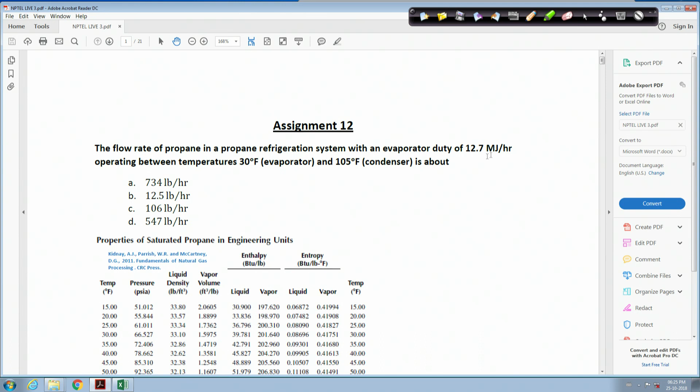I hope you will not face much trouble solving those problems. So with this, I now come to some of the problems which I am sure many of you have done correctly. I start in a reverse manner, from assignment 12. Let us see assignment 12 first: flow rate of propane in a propane refrigeration system with an evaporator duty given between two temperatures, and we are asked to find the flow rate.

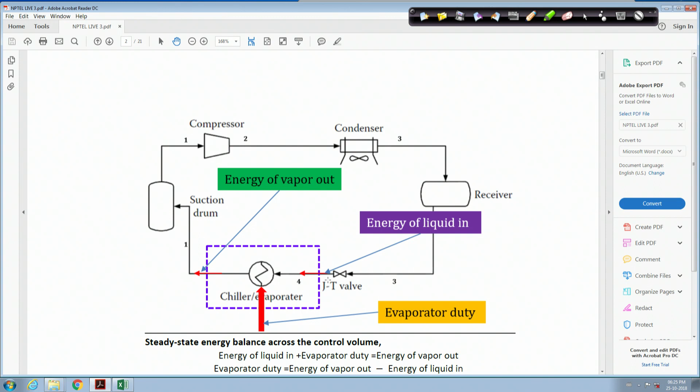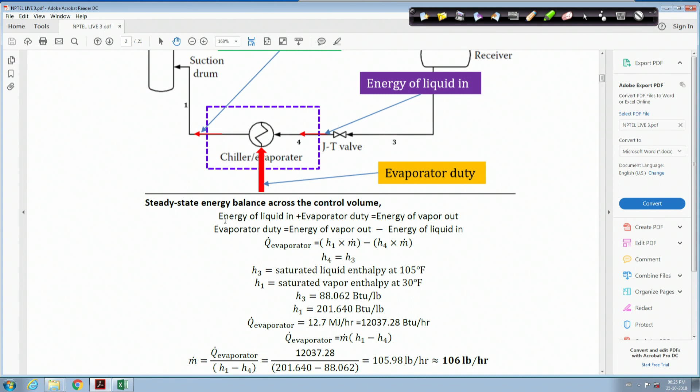This particular table has been provided to you to find out the various properties, and the solution is in a way quite straightforward because this particular system was shown to you in the lecture. So you have to refer to this particular figure, and this kind of problem was also done in the assignment and in the tutorial. You see that to solve this problem, basically you are making one energy balance.

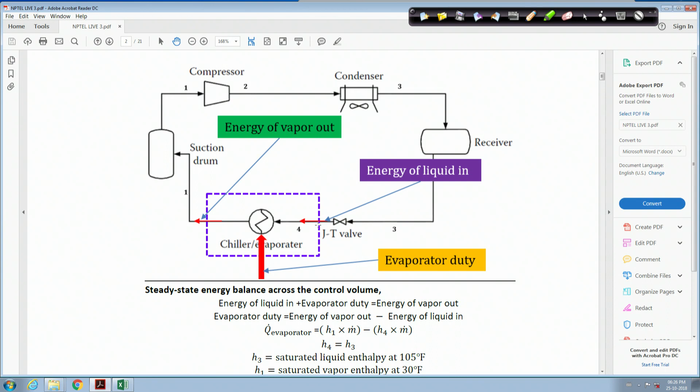If you know how to make an energy balance, you should not find any problem in solving this particular problem. Here the energy balance has been done, and here you are getting the evaporator duty, the enthalpies, the mass flow rates, and also as I told you, this particular JT valve is generally an isenthalpic process. That means the enthalpy at the inlet and enthalpy at the outlet are the same, so here you find that H4 equals H3.

So if you make this kind of thing and if you can properly locate the temperature and pressure at each of the streams, then you simply have to read out the values of H, that means enthalpy, and plug in the values in this particular equation, and you will be able to get the Q evaporator in terms of m dot, H1 minus H4, and from this you can find out the particular m dot. So this is the thing.

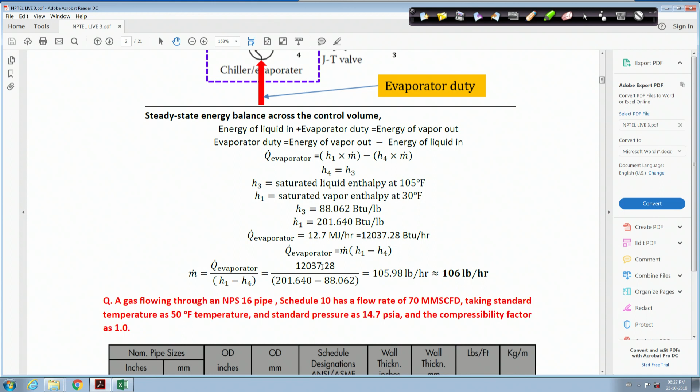Now understand one thing, that here you have been given the whole problem in a particular set of units, that is the FPS units. It does not matter what kind of unit systems are given to you, even if this kind of question is asked in SI system, or you find that sometimes there are mixed units, some SI, some FPS. So before you start solving, please make sure that you are putting all the units in the same system, then you will not commit any mistake in the final result.

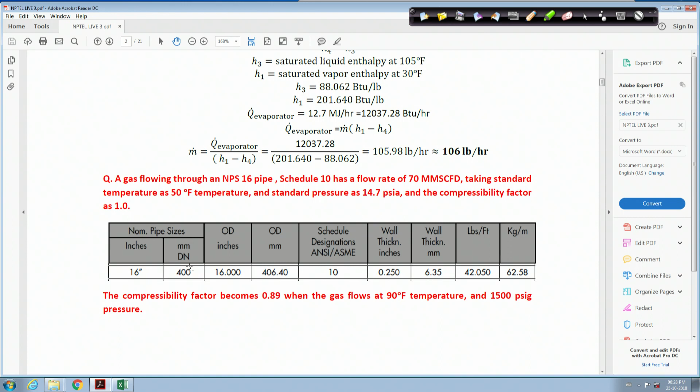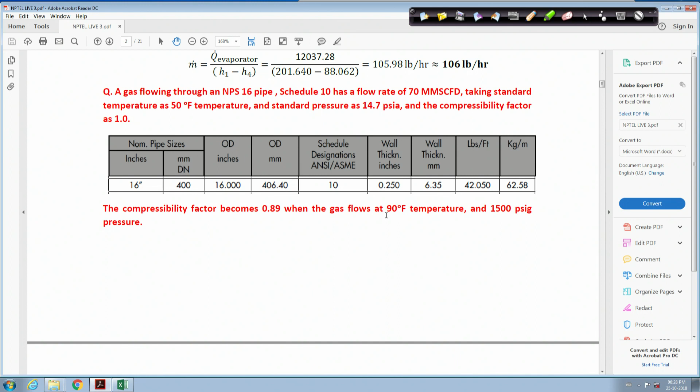Now let us come to the second problem. In this you have a gas pipeline which is NPS 16 pipe and schedule 10 which has this flow rate, and standard temperature is taken to be 50 degree Fahrenheit and standard pressure as 14.7 psi, and the compressibility factor is taken to be 1, that is it is assumed to be ideal. Then you have been given that this compressibility factor is about 0.89 at a gas temperature of 90 degree Fahrenheit and 1500 psig pressure. Now you have to find out the flow rate of the gas. So what kind of flow rate will you get?

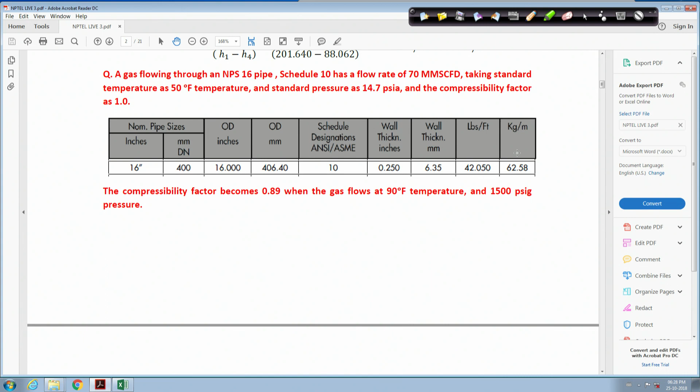Now here also these particular figures are there, this particular table you can see. This table gives you the nominal pipe size both in inches and millimeter, and then OD, ID and the schedule number, as you know this signifies the thickness of the pipe, and as per the schedule number you are given the thickness also, and here are the weight of the pipeline per unit length. Based on this you have been asked to find out the flow rate and the flow velocity of the gas in some particular unit.

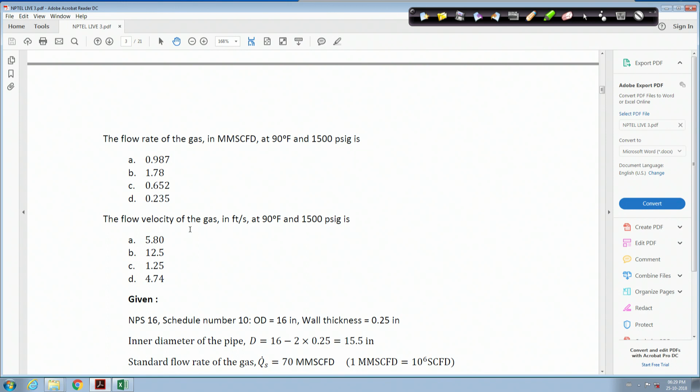Now you see that here also first you put all the information which have been supplied to you, and one thing I again repeat: sometimes you may find that the information provided to you in the particular question may be in excess of what is required. So you put all the information given in the question, but also make a proper judgment of which information is needed to solve it. You may not always need all the data given to you in a particular question. So you have to be very careful about that, and never think that if you are not finding the use of certain data in the particular problem, you are going wrong. It is nothing like that — sometimes excess data are also given.

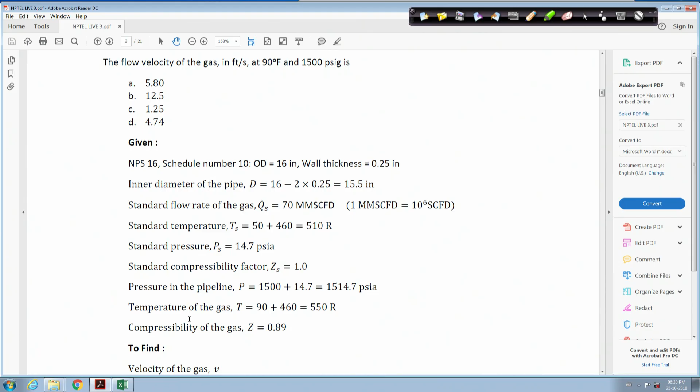On the other hand, if you find that some data may be missing in the question, it might sometimes happen. So if you find some data are missing, you can judiciously assume some values, giving some reasons, and then you can solve it. Generally it won't happen in such examinations, we also check the things, but if in any case this kind of thing happens, then you can go ahead with some justification, assume some data, and do the solution.

Unless you justify properly the assumed values, that will lead to some wrong answer, so you should be careful about that.

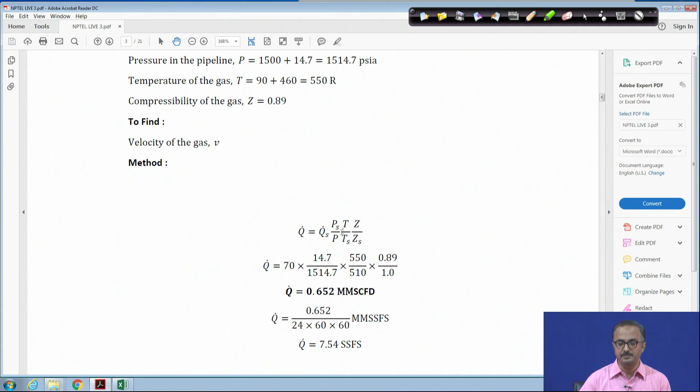In the lectures we have shown this kind of equations. These equations come simply from the gas laws, and in the gas laws, as you know, you have to give corrections for the pressure and temperature. So similar corrections have been applied to this particular problem, and you get the actual volumetric flow rate in terms of the standard volumetric flow rate, standard pressure, standard temperature, and standard compressibility factor. P, T and Z have been given in the problem, so you plug in the values and get the volumetric flow rate.

Once you get the volumetric flow rate, it is very simple to get the velocity, and this velocity is the superficial gas velocity. You have to consider the cross section of the pipeline, found by knowing the inner diameter, which is found by subtracting twice the thickness from the outer diameter. From that you can find the area of cross section, and you get the velocity by dividing the volumetric flow rate by the area of cross section.

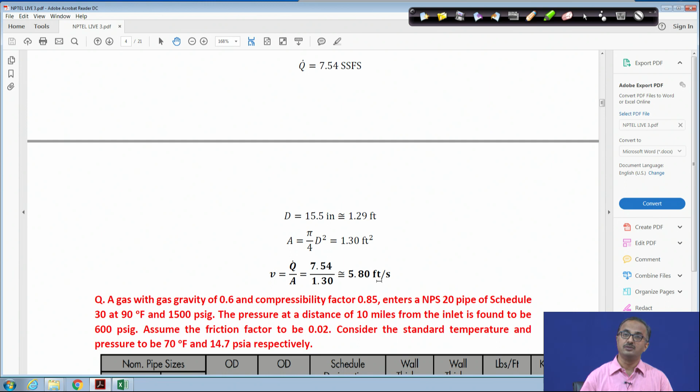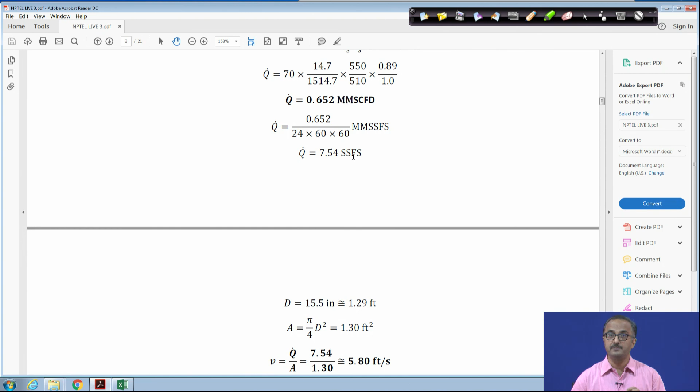Only thing you have to be careful about: when you get the volumetric flow rate in cubic feet per day, and you've been asked to give the velocity in feet per second, you first have to convert cubic feet per day into cubic feet per second. Only then should you apply this formula to get the velocity in feet per second. So this kind of unit manipulation you should be very careful about. The units are very important, and whenever you are solving problems in the rough, you should always put the units so that you do not commit any mistake, because if you put wrong units, you are going to land up with wrong answers. So avoid any kind of mistakes on the units.

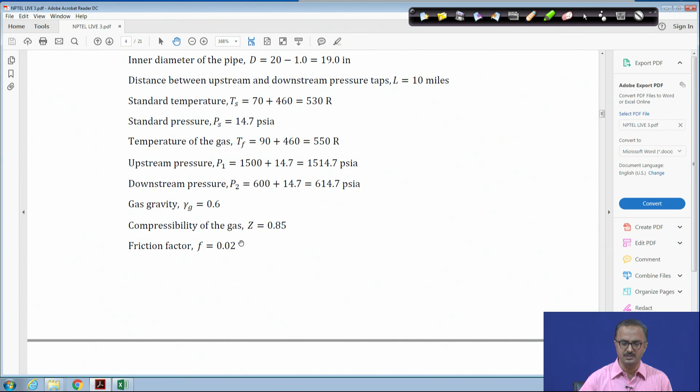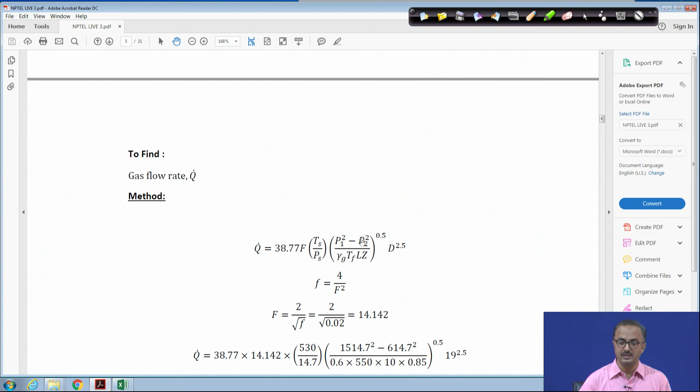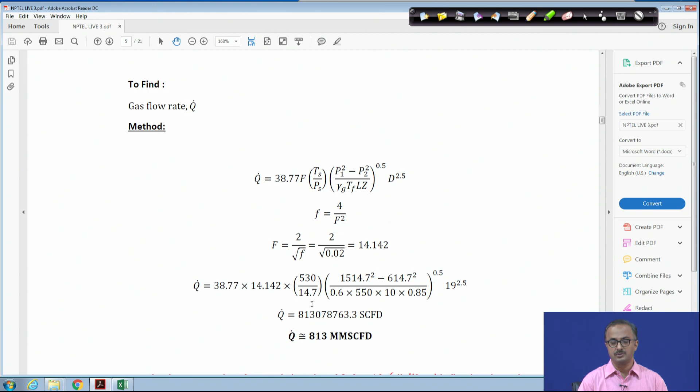This next question is similar to the previous one, so I will not go through it again. You'll find that similar formulas have been given in your assignment also, so you simply plug in the values in this formula and you can get the answers. Now understand one thing: whenever you get such a big formula, it is not expected that you will remember all the big formulas. Some very basic formulas you need to remember, but if the formula is quite big and complex, you are not expected to remember those formulae. Many of the formulae will be given to you without mentioning exactly where to use them, but if you have learned the theory properly, you should be able to pick up the right formula from the list given to you. Any complex formula will be provided to you for your convenience. You should just make sure you know where to use which formula.

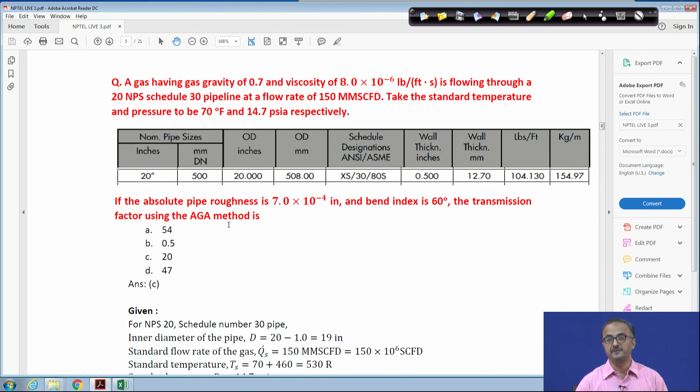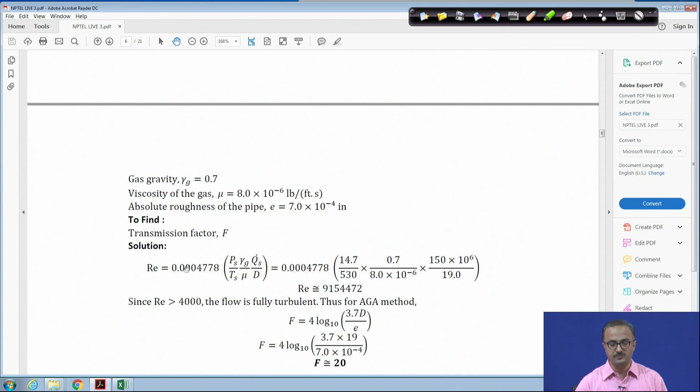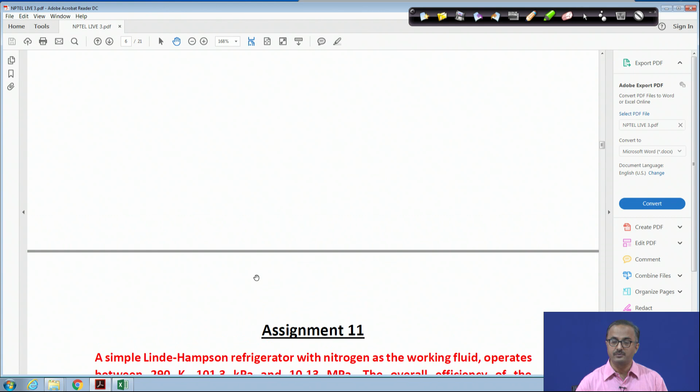This particular question is coming because I taught you different methods to find out the flow rates and the velocities, etc. These questions in assignment 12 were based on these different formulae, which you can check from the tutorial problems where solutions have also been given, or in the lecture notes. In this particular formula, we have to find the Reynolds number value, and as per the Reynolds number we have to find the value of F. This is what was asked in your question, to find the value of F.

Now let me come to assignment 11, which was focusing on the refrigerators, and in this particular problem this figure was given to you. Yes, this figure looks a bit hazy, but you can still read it if you magnify it. Just as I told you, whenever you are trying to interpolate values between the curves, you should try to make the best possible interpolation with your naked eye on this particular figure. There might be some small errors, but don't mind, the solutions are quite dispersed, the options are quite widely varying, so you should be able to get the right solution. Don't panic.

I hope by now all of you know how to read these figures, but let me quickly repeat how to read the figure. This is a temperature versus entropy diagram. On the y axis you have the temperature, given in Kelvin, and on the other side in Rankine. So these are the two standard temperatures in two different unit systems.

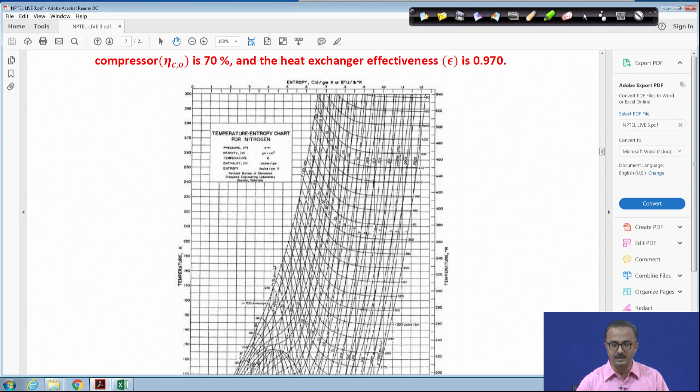On the x axis you find the entropy, and here on the top also you are given entropy. Again you see that these two systems of units are different. Here it is calories per gram per Kelvin, and here it is BTU per pound per Rankine. So these are the two systems of units which have been provided.

And here you see that there are many lines, curves are there. For example, these particular curves coming from left to right are the constant enthalpy lines. All the figures given to you, 300, 200, etc., are in joules per gram. So these are constant enthalpy curves.

Now you also see there are some constant density curves like this. It is given as constant density curve, in grams per centimeter cube. So all these constant density curves are there, and you find that different values of these densities have been given as you move from right to left.

Similarly, there are many constant pressure curves also there. From state you can find that here it is 0.1, 0.2, 0.3, 0.5. So you can see that the solid lines are the constant isobaric or constant pressure lines, and the dashed ones are the constant density lines. If you follow these lines properly, you should be able to get the answers properly.

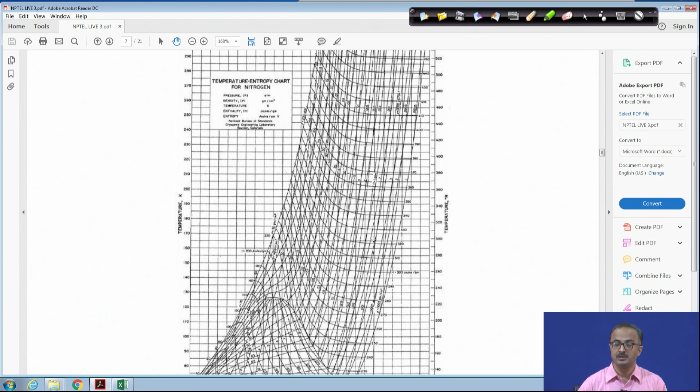As I told you, this dome structure is there. Outside the dome you have the superheated region, and on the left hand side you have the subcooled region, and within the dome you have the mixture of vapor and liquid. So this is how these TS, temperature versus entropy, diagrams are represented, and you can read them as per your requirement.

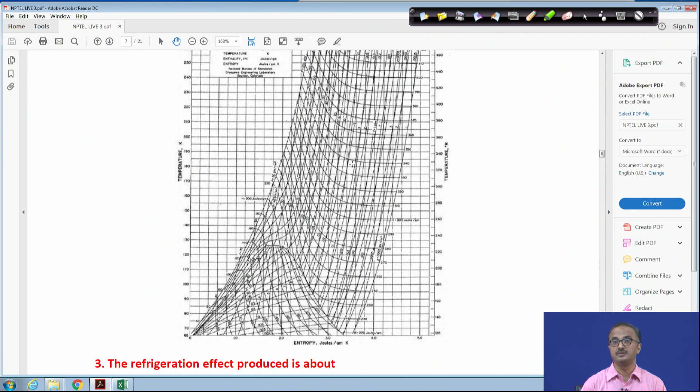Now you have been asked for a simple Linde-Hampson refrigerator with nitrogen as the working fluid. It is operating between 290 K and this much pressure, and at this pressure.

As you say, the simple Linde-Hampson ideally works isothermally from the compressor, because the compressor is taken to be isothermal. So only the pressure is changing from the compressor inlet to the outlet. Then, in the simple Linde-Hampson, you know that we are using a compressor, then a heat exchanger, and then a Joule-Thomson valve. After the valve, you are getting the cooled gas.

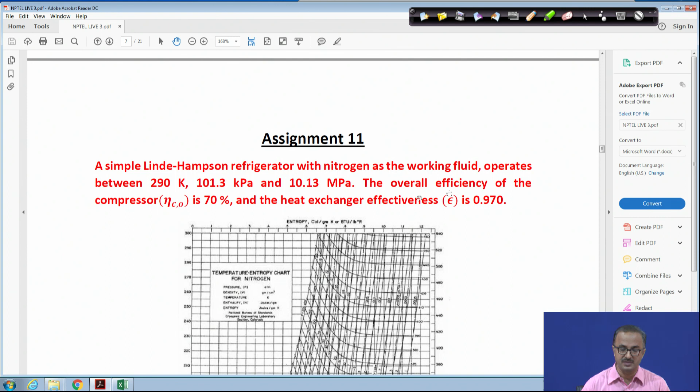The overall efficiency of the compressor has been given like this, and the heat exchanger effectiveness has been given like this. So you have been asked to find out the refrigeration effect.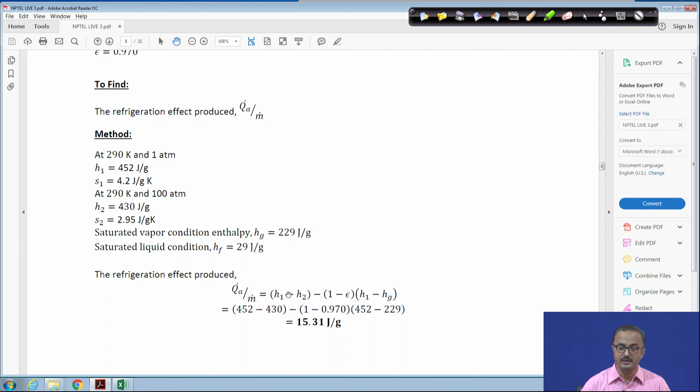Now again, all the formulas were given in the lectures, so you have to plug in the formula here to find out the duty, the refrigeration duty. That means how much refrigeration can be created in a simple Linde-Hampson.

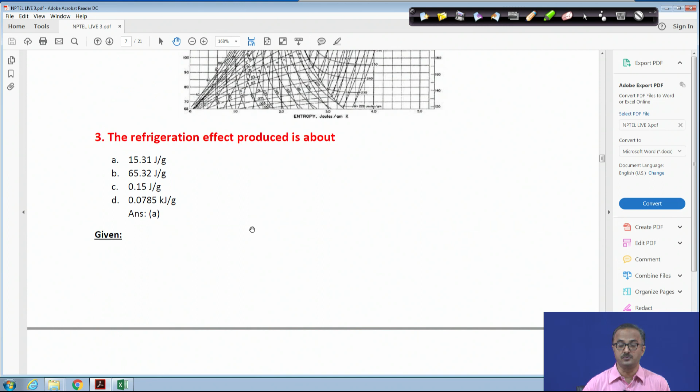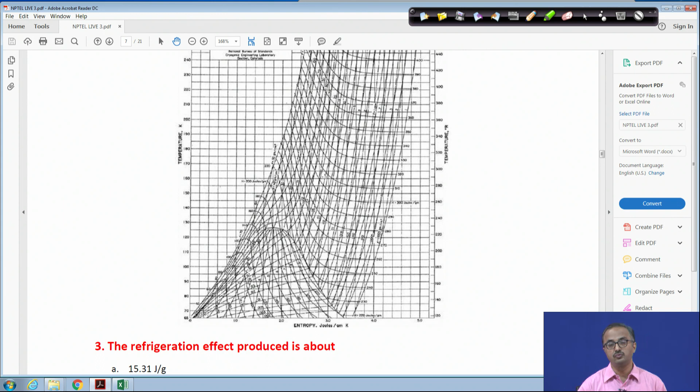One thing you have to be careful about is the kind of fluid being used. Here it is nitrogen, so we are using the TS diagram of nitrogen. If the fluid is changed, this diagram will be different. So you have to choose the appropriate diagram to solve this kind of problem.

Next, we come here, these solutions have been given to you, showing how to read these values.

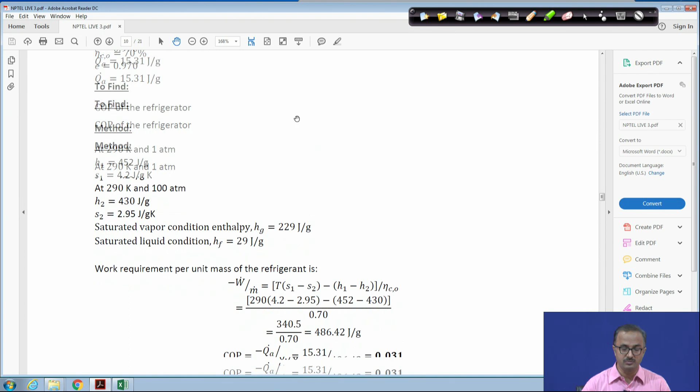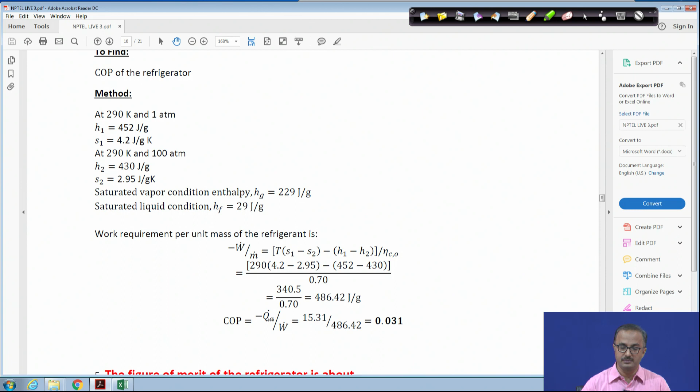Then the COP of the same refrigerator was to be determined, and again for COP you first find out the work done. This formula was also derived from thermodynamics. After finding the work done, you can find the COP by knowing the duty and dividing the duty by the work done. So, refrigeration duty divided by work done gives you the COP.

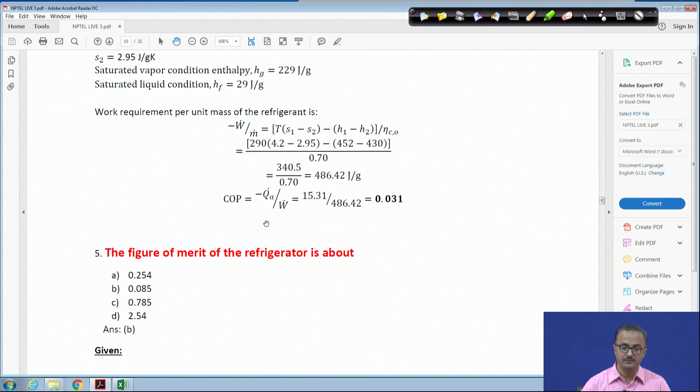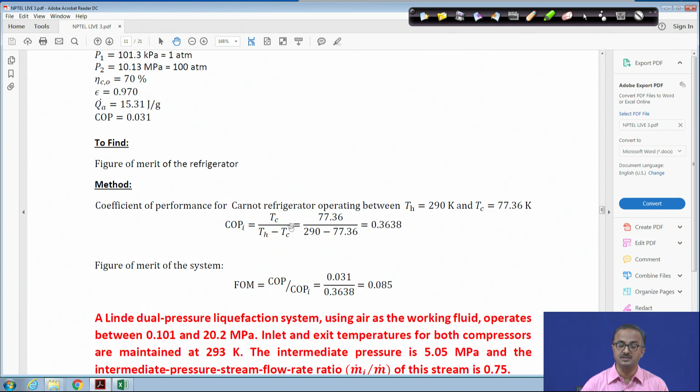Figure of merit means this is the actual COP, and if you know the ideal COP, the ratio of the two gives you the figure of merit - which is nothing but a deviation from ideal behavior. You have found the actual COP and the ideal COP, and the actual COP is much less than the ideal COP, which is expected. So the figure of merit is the ratio of actual COP to ideal COP, and this is the value you get.

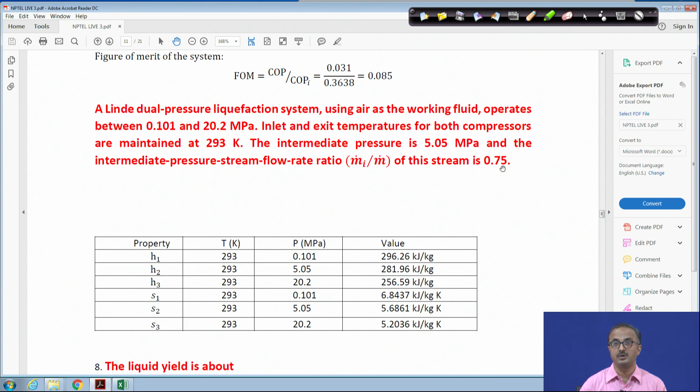The next problem was on a Linde dual pressure liquefaction system using air as the working fluid, operating between these two pressures, with these temperatures given. Because it is dual pressure, there are two pressures, so the intermediate pressure is given, and the intermediate stream is also there. If you recall the particular figure in the system, the intermediate stream is there, and the intermediate stream ratio is given as 0.75. These are some of the properties needed to solve the problem.

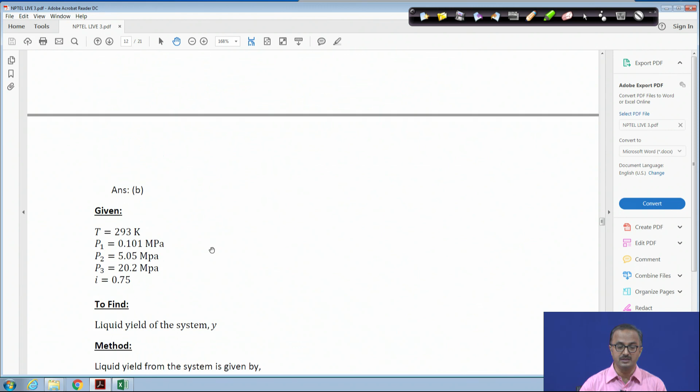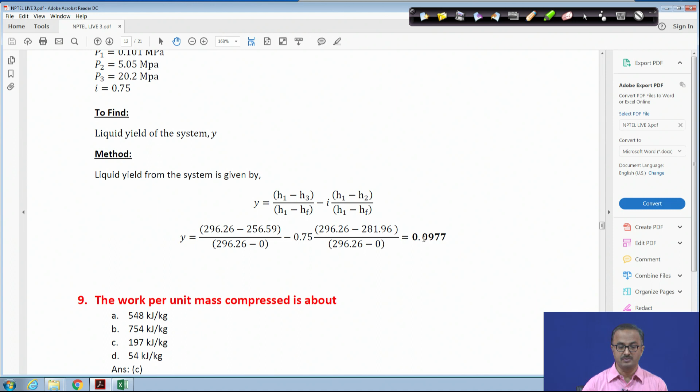This was also provided to you, and the liquid yield was to be found out using this formula. As we learned, because of this dual pressure and intermediate stream, even though it decreases the yield, it also decreases the energy requirement and compression requirement. So overall we are getting a benefit. This is the yield, and the work requirement is coming down.

Now, this is the work requirement. Again, for all these refrigeration systems you've been taught, you'll find that everywhere we are basically applying the first law of thermodynamics. So please learn this first law properly, and if you know how to apply it, you choose the proper control volume. If you have chosen the proper control volume, there is no reason for you to commit any mistake in such problems. They are very straightforward problems.

Once you have derived the energy balance equation properly, it is just a matter of reading the values properly from the given diagram or table and plugging them into the formula to get the answer. So just learn the application of the first law of thermodynamics - everywhere we are using it to get the answers.

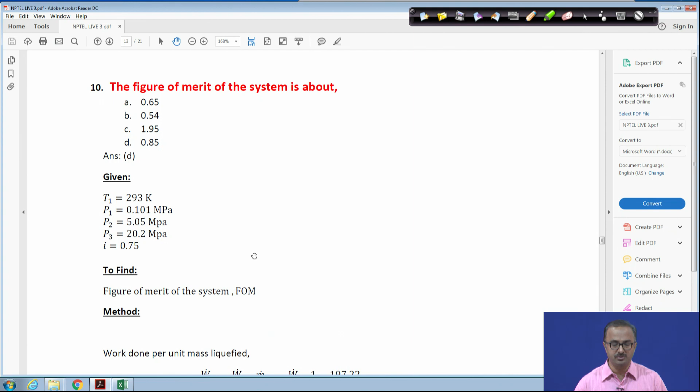Similar to the previous problem, here also we are supposed to find the figure of merit, and this is the formula - plugging in the values gives you the figure of merit.

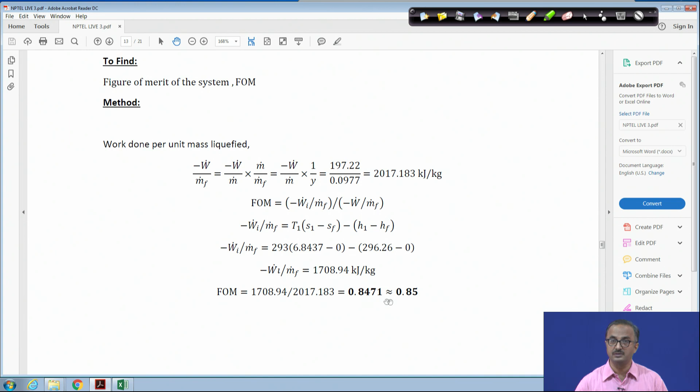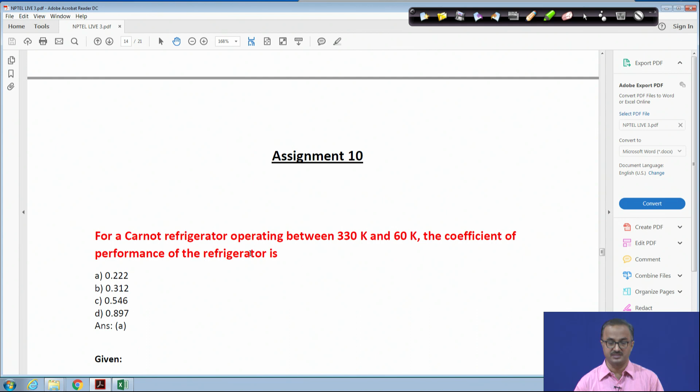Now I am skipping the theoretical questions, focusing only on the numerical questions in all these assignments. Coming to assignment 10, here we have a Carnot refrigerator operating between these two temperatures, and we are asked to determine the coefficient of performance of the refrigerator. This is a very simple, straightforward formula which you've been taught in thermodynamics - if you know this formula, you can get the COP.

This particular formula for the Carnot engine is very straightforward and simple, so this kind of formula is expected to be remembered by you. Not all formulas will be given, because some are very straightforward - for example, the ideal gas law or real gas law like PV equal to nRT or PV equal to nZRT. So this kind of formula will not be given to you; some you have to remember. Similarly, this formula for Carnot cycles should also be remembered.

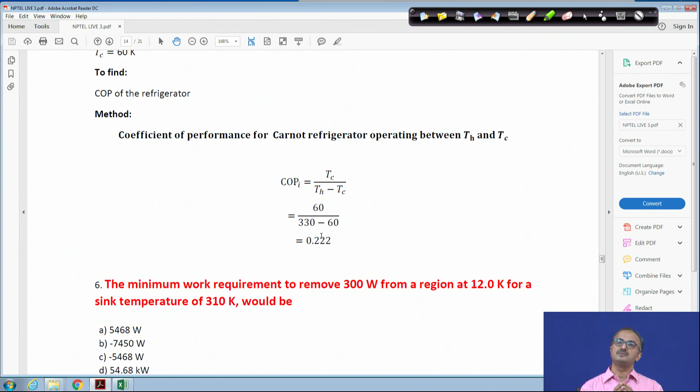So here, if you have been given the high temperature and low temperature - that means the source temperature and sink temperature - once you know those, you will be able to find out the ideal coefficient of performance for the Carnot cycle.

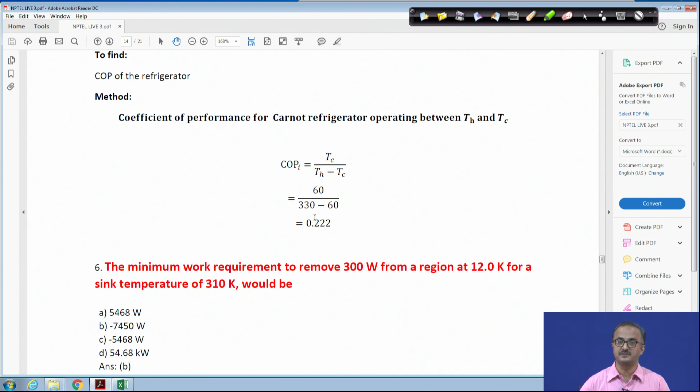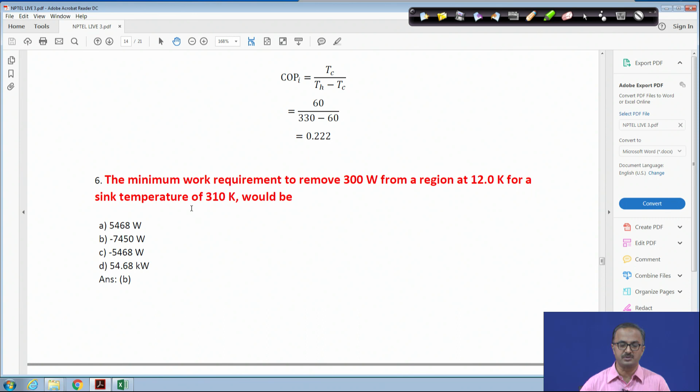Next is the minimum work requirement to remove this much amount of heat from a region at 12 K for a sink temperature of 310 K. Again this formula is for the Carnot cycle, and we are getting this particular value for the work requirement.

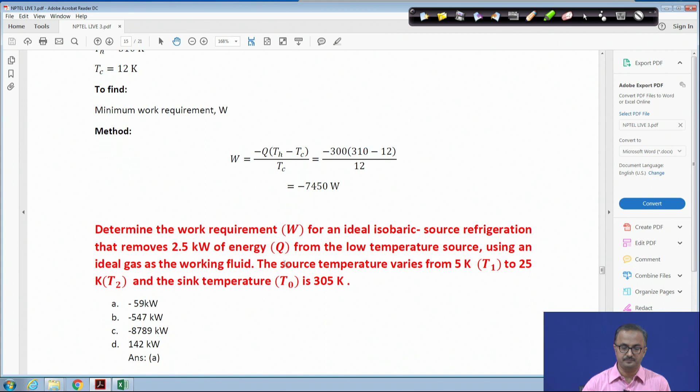Now determine the work requirement of an ideal isobaric source refrigeration that removes 2.5 kilowatts of energy from a low temperature source using an ideal gas. The source temperature varies from 5 K to 25 K, and the sink temperature is 305 K.

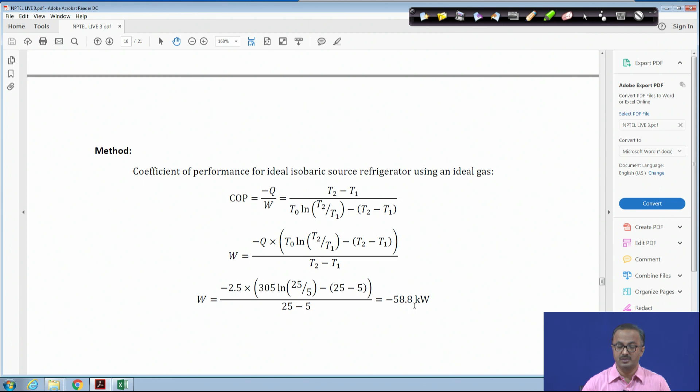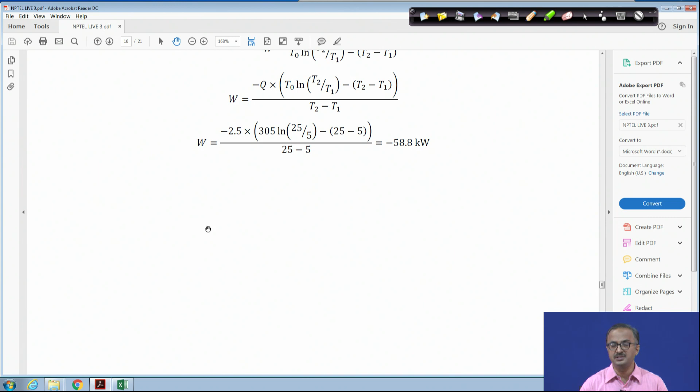Here it's different because the source temperature is not constant, it itself is changing. This kind of problem was taught in the lectures and similar problems were done in the tutorial. If you followed them, you'll recognize this formula for the coefficient of performance of this isobaric refrigerator. All the temperatures are given, and you simply plug in the values along with Q to get the work done. Nothing much to discuss here, as these are straightforward applications of the formula, but you should understand the significance of each piece of data given.

Now coming to assignment number 9. Here this particular statement has been given to solve questions 6, 7, and 8.

You are given 100 kilomoles per hour of saturated liquid feed containing 30 mole percent benzene with its boiling point given, 30 mole percent toluene with its boiling point given, and 40 mole percent ethylbenzene with its boiling point given, to be fractionated by distillation to recover 98% of benzene at the top and 94% of toluene in the bottom product.

The column pressure is essentially atmospheric, and the reflux returned to the tower is at its bubble point. The average relative volatilities have been given for 1 and 2, meaning benzene and toluene, and for 3 and 2, meaning ethylbenzene and toluene. So what has been asked?

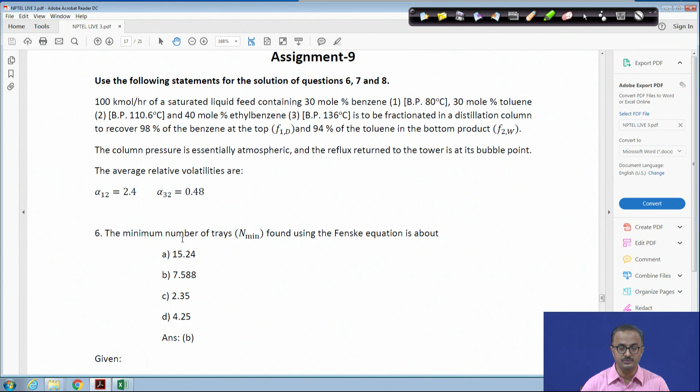You have been asked to find the minimum number of trays using the Fenske equation. This is a problem of multi-component distillation, and we said there is a shortcut method where we assume the HK and LK.

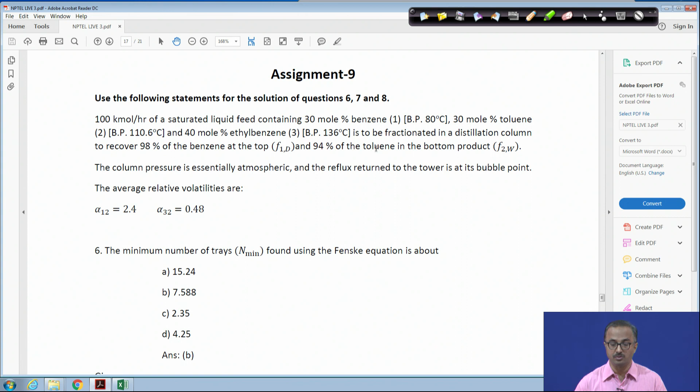Similar things we are doing here, since we've been given the separation in terms of benzene and toluene in the question, we put these into the Fenske equation formula in terms of benzene and toluene, and plug in the values to get the minimum number of ideal stages.

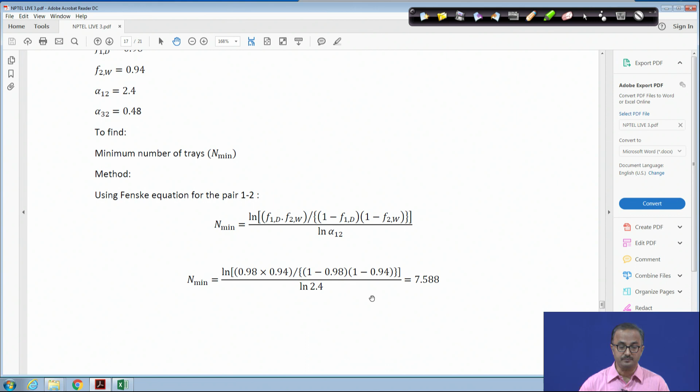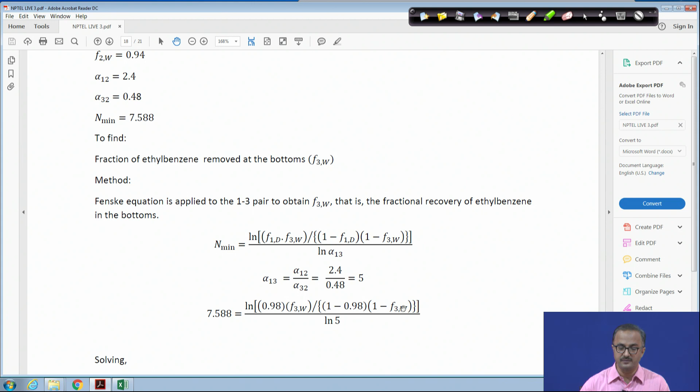Similarly, we've been asked the fraction of ethylbenzene removed at the bottoms. Once you get the ideal number of stages, you find alpha 1-3 by taking the ratio of alpha 1-2 and alpha 3-2. Plugging in the values, you write n-min in terms of components 1 and 3, and using the previously found n-min, you can find the value of F3W. Again, this is simply some manipulation of the same equation.

Next, we were asked to find the minimum reflux ratio using the Underwood equation, which was also given. Here you're given the feed condition, and you have to find the Q value.

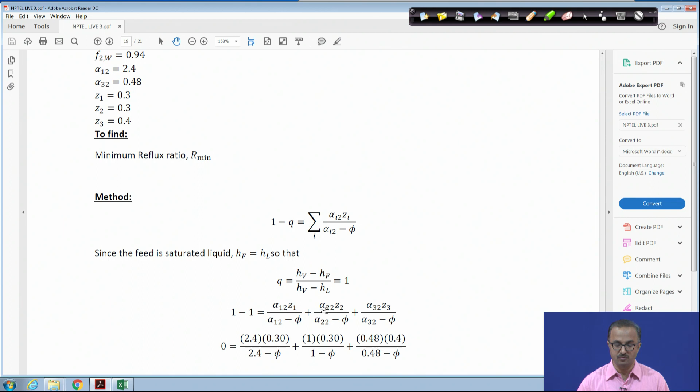The feed is saturated liquid, meaning HF equals HL, the saturated liquid enthalpy, so Q comes to 1. You put this value of Q along with the values of alpha 1-2, alpha 2-2, etc., plug everything in, and you find you're getting a quadratic equation in phi. Both resulting values come out positive.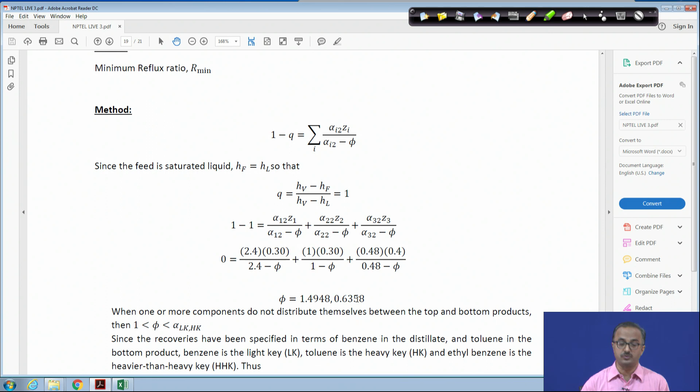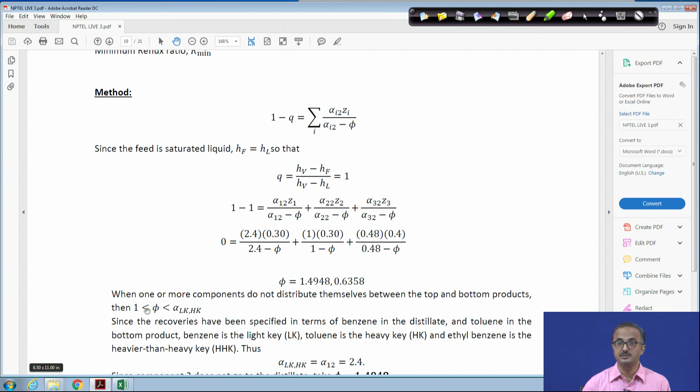Since phi has to be positive, which one should be chosen? As taught, when one or more components do not distribute themselves between the top and bottom products, phi lies between these two values, that is 1 and the relative volatility of LK with respect to HK.

In this case, LK is the light key and HK is the heavy key, and this HK-LK concept we use for shortcut computations in multi-component systems. In our problem, benzene is taken to be the light key component, and toluene is taken to be the heavy key component.

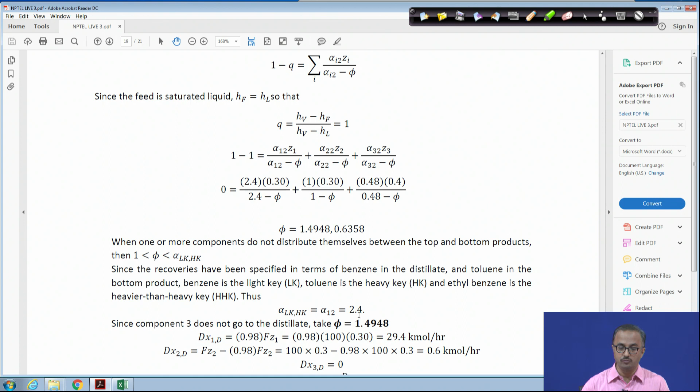Now, because ethyl benzene has a molecular weight more than that of toluene, we say ethyl benzene is HHK, meaning heavier than the heavy key. So LK-HK basically means this is 1-2, and this 1-2 is given as alpha 1-2, which is taken to be 2.4, the value of alpha LK-HK.

These things were taught to you in the lecture, so just follow the lecture. You have to find the value of x1d, and then find the value of xd2 and x3d, because ethyl benzene is not present in the distillate, so this comes to 0.

Now, this equation for V min was also derived in the lecture. If you plug in the values in the summation, you get the value of V min. Once you get D, the distillate flow rate, this is the formula to find the distillate flow rate, meaning you add the individual flow rates to get it.

Once you get the distillate flow rate, you know the reflux ratio is L by D, and if you do the overall mass balance, you find that R min plus 1 into D equals V min. Since V min is already found, you can find the value of R min.

These formulas are derived from first principles, like the material balance to find the reflux ratio, which is quite straightforward. We won't just give you those material balances - you are expected to remember them, and even if you forget, if you identify the control volume properly, you should be able to quickly derive this material balance correlating R min, D, and V min.

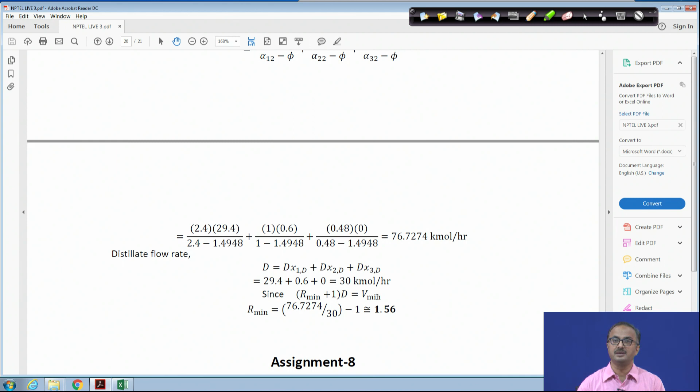So if you can derive it properly, you should be able to get the value of the minimum reflux ratio.

Next we come to assignment 8. In the sixth problem, you are asked to find the number of stages required to compress natural gas from this particular pressure to this pressure. Both are gauge pressures - this is very important to remember, because whenever pressure is given in gauge, before starting a compressor problem, you have to convert the gauge pressure into absolute pressure.

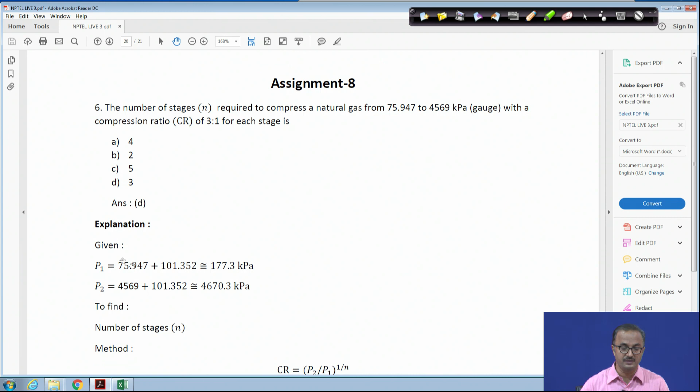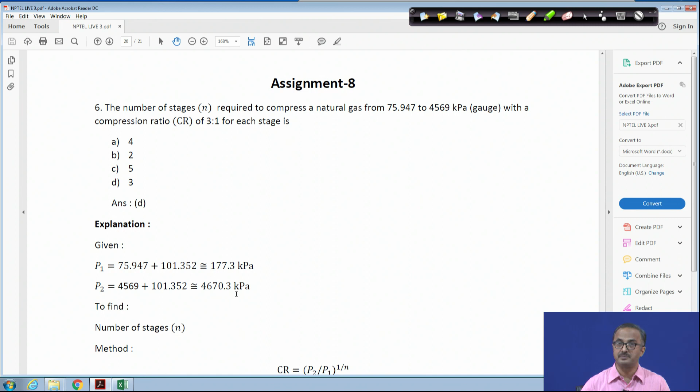So it's important to note the units in which the data is provided. Here we convert the given gauge pressures by adding the atmospheric pressure, about 101 kPa, to get the absolute pressure. These absolute pressures will be used to find the compression ratio.

Understand one thing - if you do not convert the pressures from gauge to absolute, the answer will definitely be wrong, because the things are getting added, not multiplied. Had they been multiplied, it wouldn't matter, but since they're being added, you will land up with wrong answers if you don't convert gauge pressure into absolute pressure.

Once you have done that, plug in this particular equation and you will get the number of stages. You see the number of stages comes out in fraction, so it cannot be a fraction - you have to round it off to the next whole number above, not below, so 2.98 is taken to be 3. So you need 3 stages to achieve this compression.

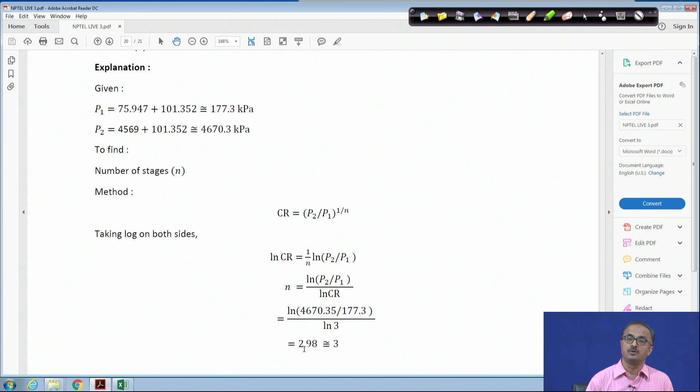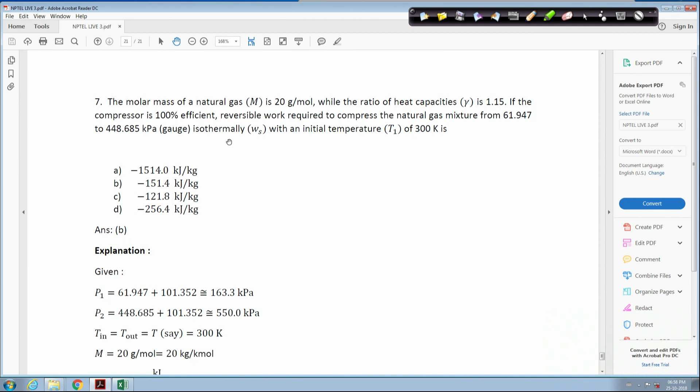This is very important, that the work requirement changes whether you are taking isothermal, isentropic, or polytropic compression, and depending on that the work requirement would change. So you have to be very careful about each of the statements, each of the words and phrases given in the question. Read them properly, do not be in a hurry, do not skip any of the words and phrases, otherwise you are going to mess up the things.

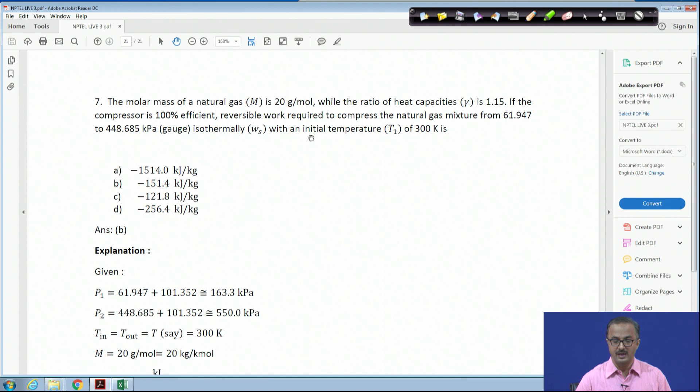So it is isothermal compression, and you have to use the appropriate equation to find out the work, and the initial temperature is given like this. Because it is isothermal, the inlet temperature and outlet temperature of the compressor is going to remain the same, so it is 300 Kelvin.

Again you convert the pressures from gauge to absolute by adding the atmospheric pressure, and you see that this is the particular equation for work requirement. Even this particular equation can be derived very quickly, if you know how to derive it, just integral of V dP, using the ideal gas relation.

You have to appropriately take the pressure volume relationship for an ideal gas. If you plug in the things, you should not find any problem deriving this particular equation, because the isothermal condition means PV equals constant, that is P1V1 equals P2V2, and for an ideal gas again PV equals constant.

So when you are doing this integral of V dP, you can replace P in terms of V or V in terms of P as the case may be, and derive this particular equation, because here the data are given in terms of pressure. So you will convert the volume in terms of the pressure and you will get this particular equation.

This equation, I feel, should not be crammed, you should be able to derive it. Better you practice it a bit so that you can get this kind of small equations without wasting much time in cramming.

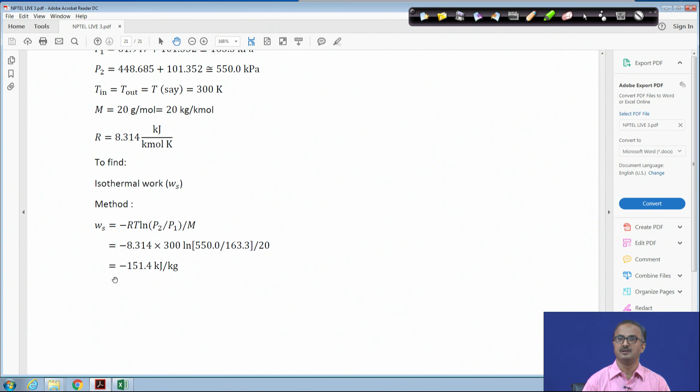Now be careful about the unit of the universal gas constant. This universal gas constant is something that you should remember, and in this case 8.314 is kilojoule per kilomole per Kelvin, or joule per mole per Kelvin. So be careful about the unit of the universal gas constant, and also be careful about the difference when you are using universal gas constant versus simply the gas constant, and you should know the relationship between the two.

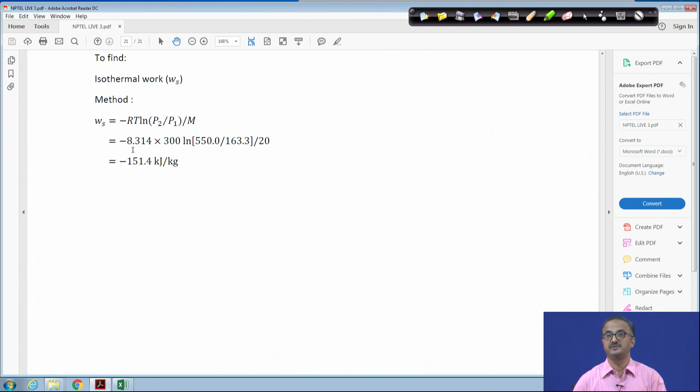I am just telling you some tips for the examination, because many times these small things, which are very important, are sometimes missed, and you make some kind of silly mistakes in your examination. I do not want you to lose any marks because of this kind of silly mistakes. So, all these problems which I have just covered were not covered in the last live session.

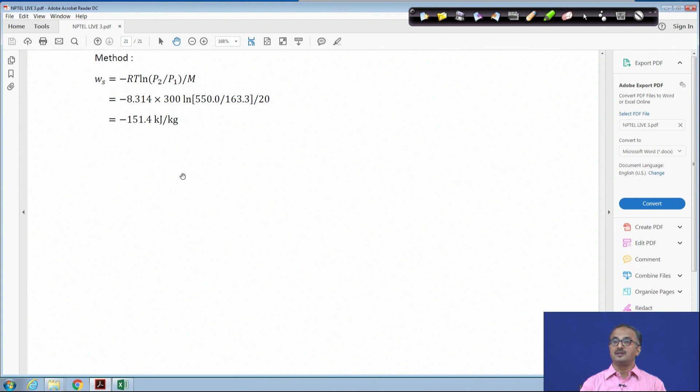With this I again repeat myself that don't panic, just follow your lectures, follow your assignments, all the assignment solutions, and any kind of corrigendum I have put on the web. Follow each and everything properly, and take all the tips I have just provided about the kind of commonly made mistakes by students. If you keep those things in mind, I am pretty sure you will be doing quite well in the examination, and you still have a few more days to go.